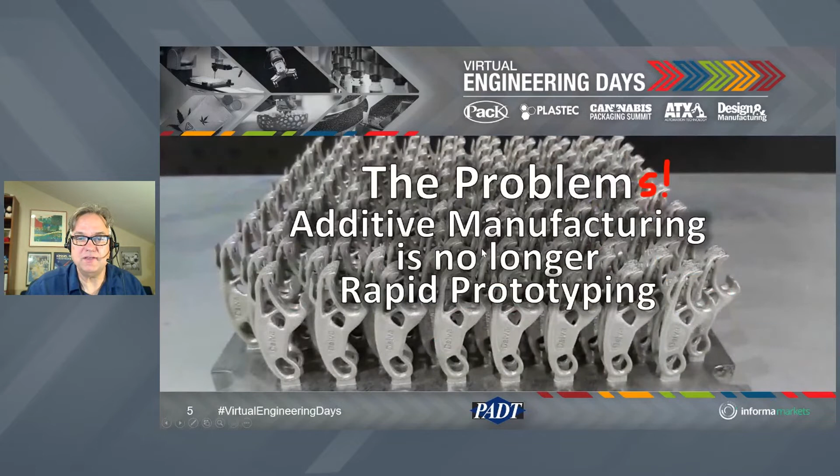So that's a little bit of an introduction about who we are and who I am. So what's the problem? Actually, it's multiple problems. Additive manufacturing is no longer rapid prototyping. We developed this whole world of 3D printing as a service, or internally within a company, really as a way to do prototyping - that's where it was used primarily, maybe a little tooling here and there, but you really weren't making parts that were going out in the world, and you didn't have to worry so much about how the material behaved over the long run. Oftentimes, as a prototype, we were more interested in what it looked like rather than what its mechanical properties were.

In the early days - we've been doing this for 27 years now - every time we handed somebody a new part, they would go, 'Oh, this is cool, how strong is it?' and break it, right? Because we just made it out of a very brittle photopolymer. Well, that's definitely changed. We have a huge selection of materials available now, and a lot of different technologies that we can apply to make our parts. So let's get into a little detail about the problem.

So I'm going to be talking about both metal and plastic here, going back and forth. In metal, we have a real problem with process failure driven by the material properties, mostly the thermal mechanical material properties. We get residual stresses in our build based upon heat differences, and that can cause cracking like you can see in the picture over there. That's one problem we have to be very aware of when we pick our materials.

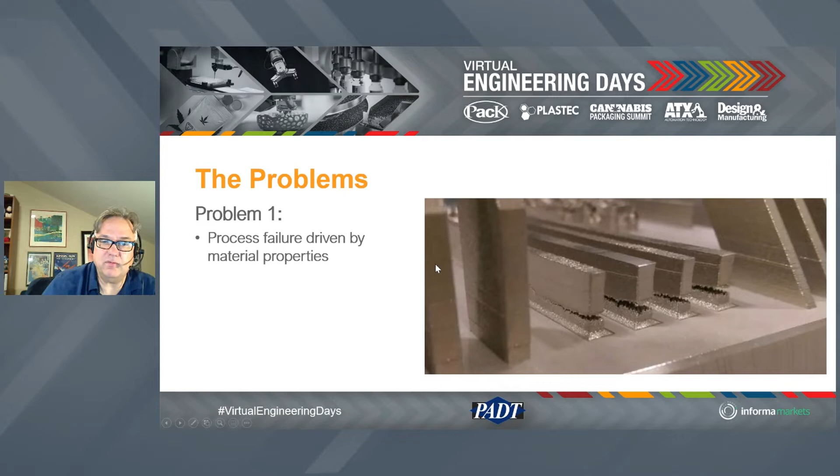The next is, we have these new processes that allow us to make things we haven't been able to make before, and also the end properties. We've got new materials, and still, in many cases, because most additive manufacturing processes are layer driven, we're creating material one layer at a time. We end up with properties that aren't uniform in every direction - they change based upon whether you're in the plane of the build layer or not. We have issues with delamination, and issues with being stiffer in one direction than the other.

Probably the biggest problem is, over time, we've developed this industry knowledge of which materials to use for which things. And that's gone now. Those material assumptions we make when we're doing injection molding or machining or metal forming are no longer valid. We have to take a look at new ways of doing things. So that's part of the problem as well.

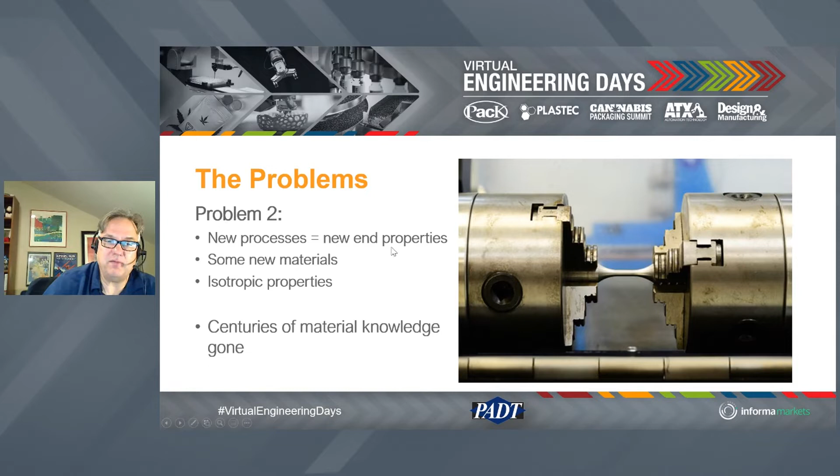That's great if we can pretty much find an analog for a given machine for the material we would use for traditional manufacturing. But the reality is that each machine has a limited number of materials available for it. It's driven by the process. If you're talking about stereolithography, you have to have something that's a photocurable polymer - something that when you hit it with ultraviolet light, turns from a liquid to a solid. If you're doing fused deposition modeling, it needs to be a thermoplastic that you can melt and that will solidify strongly when it cools off. Same thing for some of the new jetting technologies - it has to be a powder, maybe uniform or non-uniform depending on the process, and I've got to find some way to bind it together so I can make my part.

Sintering's the same thing, laser powder bed's the same thing. All of these technologies drive the material options that are available because they have to work with the technology, and that's kind of the factor that makes it difficult.

Another reality is, why are there limited materials? There may be a possibility for more materials, and every once in a while we'll run into a customer who says, hey, it would be great if we had access to this material. And we go to the people that make the material and they say, well, that's great - when you find more than one person that wants it, we'll go ahead and add it. So there has to be a demand as well. It's a bit of a chicken or the egg before they add any material - there has to be a big enough demand.

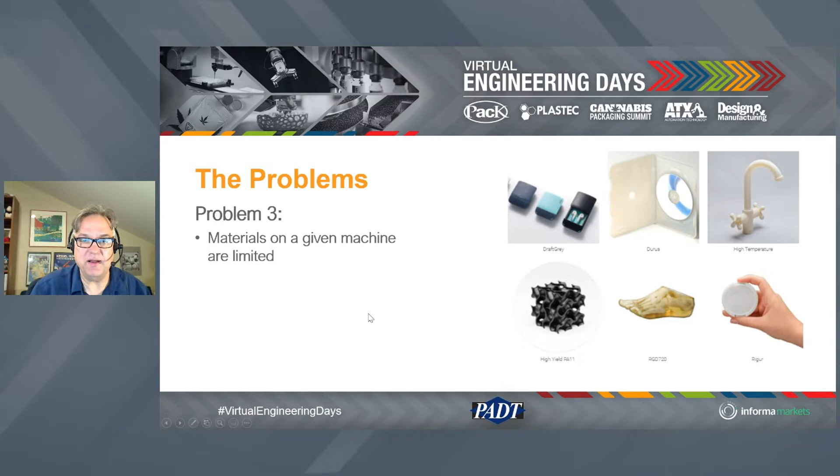Problem number four, which we'll talk about at the end of this presentation, is that we have to track the source, the storage, the process, and the post-processes of the material, because all of those things drive the end properties. When we were making a part as a fit, form, and maybe even function prototype, we didn't really care - we just wanted it to work. Now we have to really worry, because it's going to be out there.

Now, in an airplane - that's one extreme, and I picked that for a reason, because a lot of people are looking at replacing structural parts with 3D printed parts in an aircraft. Now you really have to track. You had to track anyway, but now you really have to know the whole lineage of the part.

But even if you're 3D printing for medical or for a consumer product, say a sporting goods product that's 3D printed, you still need to know, because we don't know how these are going to behave in the long run. We don't know what problems we're going to have. Say we're making bicycles and we're 3D printing parts in the bicycle - we won't know for a couple of years. This is all new. Whether that carbon filled polymer is going to last 30 years, or 20 years, or 10 years, or is it going to crack. And if it does, we need to know what's out there. So we just need to know. That's been a big change.

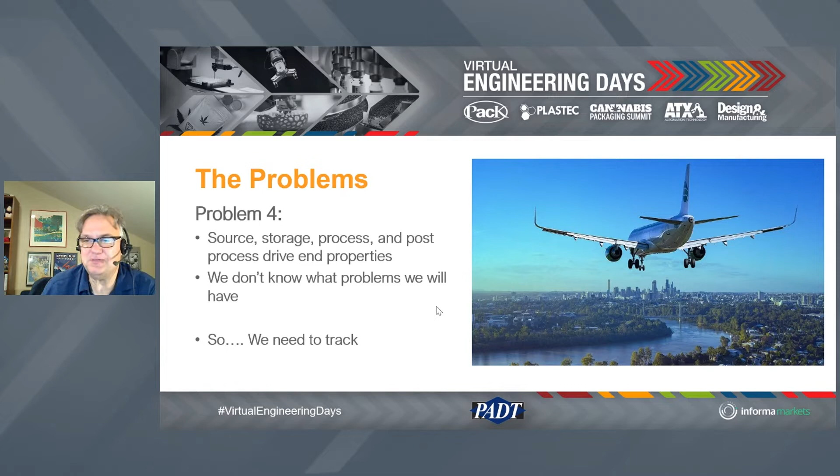And even tooling, it's true. In the past, it was so easy to make a new tool - it would just break and we'd make another one. But now we need to kind of know what's going on.

So what's the solution? What do we recommend to our customers? It's to iterate on the material selection, and then, kind of obvious, track things, and some suggestions will come on how to do that.

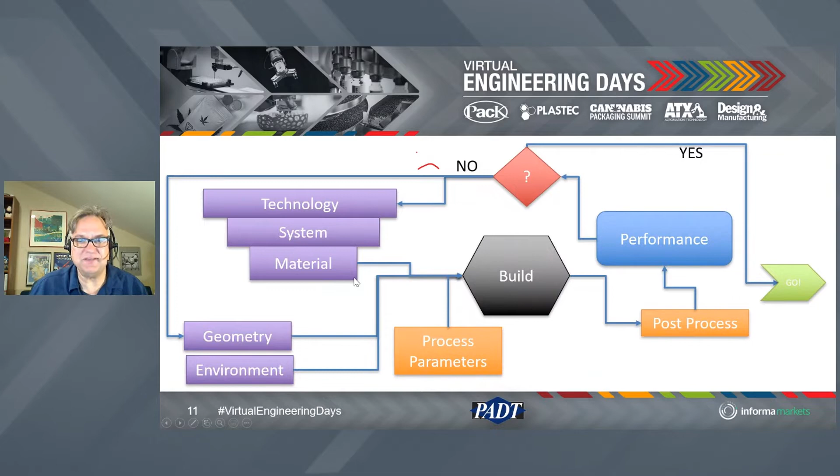So this is kind of my cartoon of what the process is to 3D print a production or maybe even a tooling part. You start over here on the left with your technology. You pick your technology - I'm going to make this on this type of machine. Well, of those machines, I have access to these systems within that family.

Say I'm going to do metal - we have EOS, I've got a particular EOS machine. Well, what materials can I run in that particular machine? So within that selection of materials, I can now make my decision.

I've also got geometry, which drives the final behavior, the environment that it's going to be working in.

As with any manufacturing process, but especially additive, I care about my process parameters. What's my build orientation? What's my layer thickness? What's my beam speed? What's my beam diameter? What's my temperature? What are the things that drive my build? Those also affect final material properties, so that goes in there as well.

I do my build, then I'm going to post process it. Whether it's metal or plastic, I still got to post process it. Say it's stereolithography, I got to put it in a curing oven to get a full cure on it. How much I cure, how long I cure, can actually affect the final material properties.

That gives me my performance, which is what I care about. And now I got to decide, well, after all those decisions and the build is done, does the material performance meet my requirements? If it is, yay, I can go. If not, it's a problem - I got to go back and build it again.

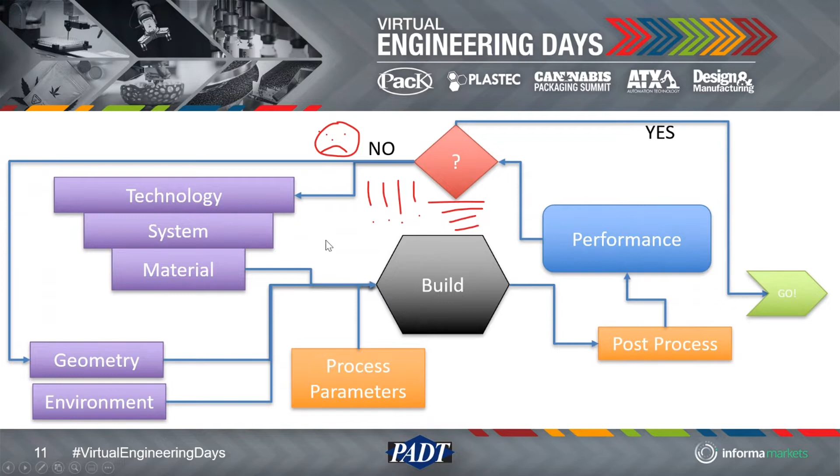This has been kind of the traditional process in choosing materials - we just kind of try it until it works. Which is okay if you have time, or maybe your cost plus, but if you've got a budget and a schedule, it's not such a good solution. So iterating is something you have to do to get acceptable performance. Trial and error, build and bust, and time and money cost money.

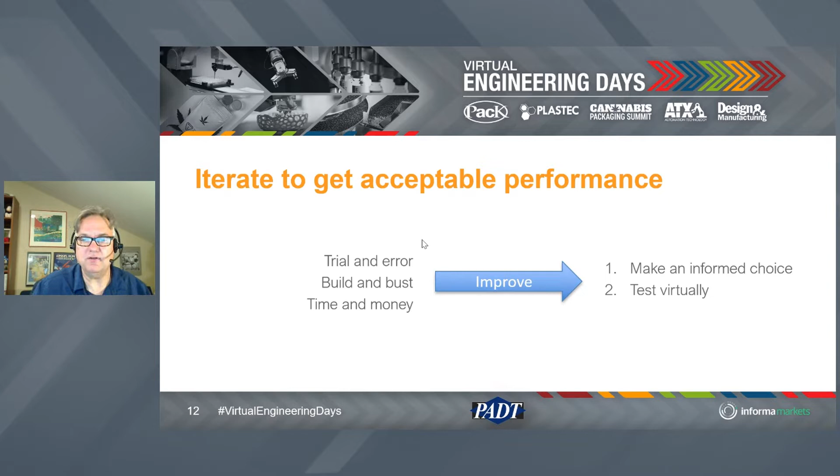So what we want to do is make it as much of an informed choice up front when we pick the materials. We want to be a little bit better instead of just saying, well, that looks okay - we want to pick the right material. And then we want to use virtual testing. I'm going to talk a little bit about both of those.

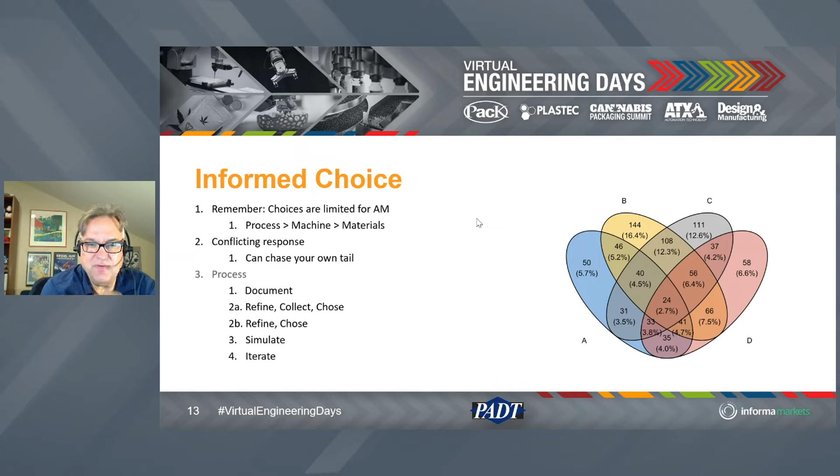So making that informed choice - remember you've got a subset of materials you can use. You pick your process, you pick your machine, and then the materials that are available on that particular machine. And what often happens is within that limited set, you get responses that conflict - you get some of these really kind of crazy Venn diagrams where, well, this one meets my requirements for creep, but it does not meet my temperature requirements. So you can really end up chasing your own tail trying to do that.

So we recommend a process of documenting, refining, collecting, and choosing - or if you've got a tool, refine and choose - and then use simulation and then iterate. So we'll dig a little bit deeper into those steps.

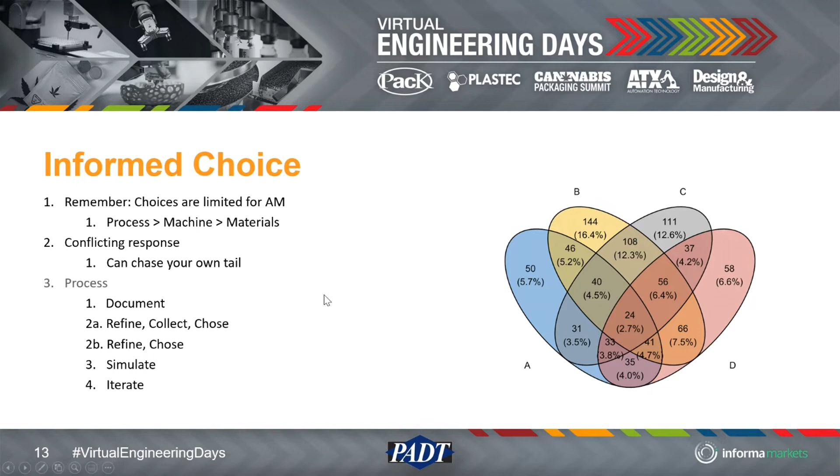So the first step is documenting. This is kind of engineering 101, but sometimes because we're using traditional manufacturing, we don't have to do these things - we've kind of lost our mojo around this sort of thing. So we got to go back to principles and start by capturing the material response requirements - write it down. What's the stiffness, the yield, the hardness, the creep, the fatigue?

And we recommend doing it in a uniform way, so every time you work on a new part, you've kind of got a matrix that you fill out so it's consistent from part to part.

Then you also have to capture the environments. Some examples are ultraviolet radiation - is it going to be in the sun? What's the chemical, what's the moisture? I left out temperature, which is a huge one as well - we sometimes get requirements for parts that need to work in Alaska and Baghdad.

And two extremes in military applications. So knowing those things is really, really important.

What are the other requirements? What are your cost restrictions? What's your lead time, right? You may not be able to get the material you want, or there may be some other things. If you use this material, you've got to do some other things that slow it down.

Geometry is also really important. You've got your initial geometry, right? What the design people came up with. This is the part I want. And you should document what you can change, because you might not be able to get where you want to go with the materials you have available, but if you change the design slightly, then you can get there.

If you're really being sophisticated, you can assign weighted importance to certain things, right? So what is the most important thing? Is it fatigue life? Is it hardness? Is it how well it resists certain environments?

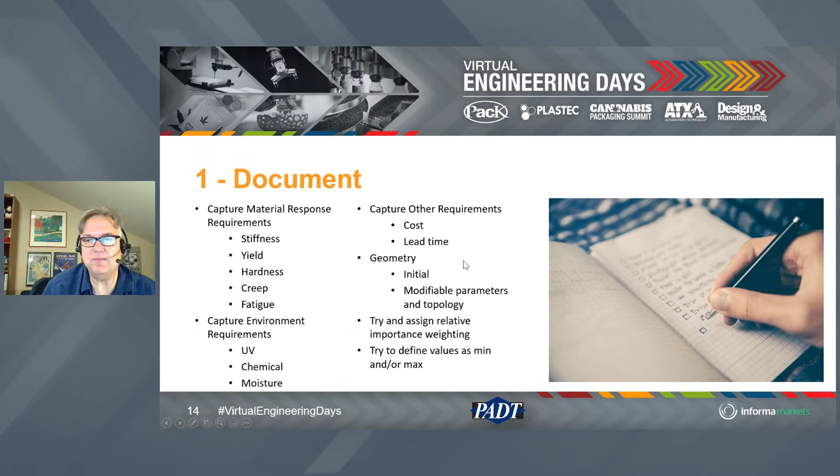Also try to define the values as mins and maxes, not just 'here's the yield I need.' Give it a range, right? So that gives you more flexibility to find a material that hits the sweet spot. Keeping this, documenting this and writing it down in a consistent way is very important.

Let's assume you don't have a tool, which I'm going to talk about next, to help you make that decision. So you're going to manually pick your materials, which is fine. If you don't do it very often, it's fine. So what you're basically going to do is refine the process, the system and materials, collect all the available materials you have. Go to the vendor site, find the materials they have, get the material properties.

One thing I often see is they'll use, say, the material sheet as shown in this picture, but every vendor is a little bit different. And sometimes even within a vendor, the material properties are shown in a different way, right? So what I recommend you do is make your own little spreadsheet or document that has material properties in a consistent way.

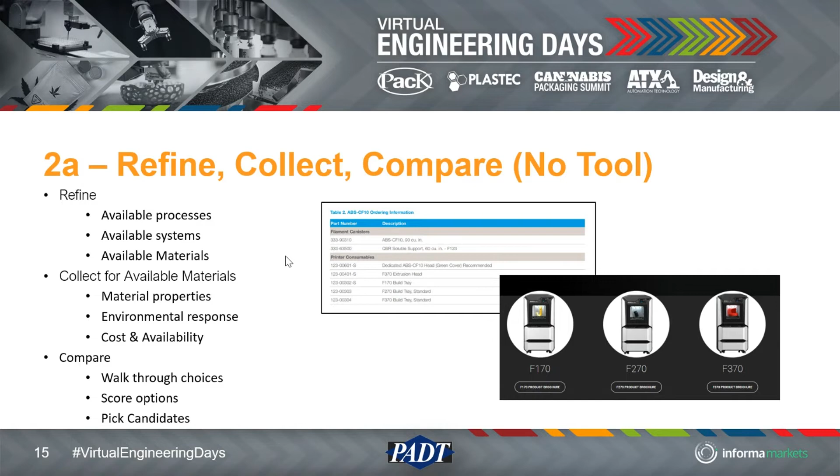Also for that material, document what's the response to environment, how susceptible is it to temperature, what's its temperature range, what's its creep response, these sort of things, as well as kind of a ballpark look at cost and availability, right? Well, cost doesn't have to be ballpark. You can figure out what the cost is per pound, right?

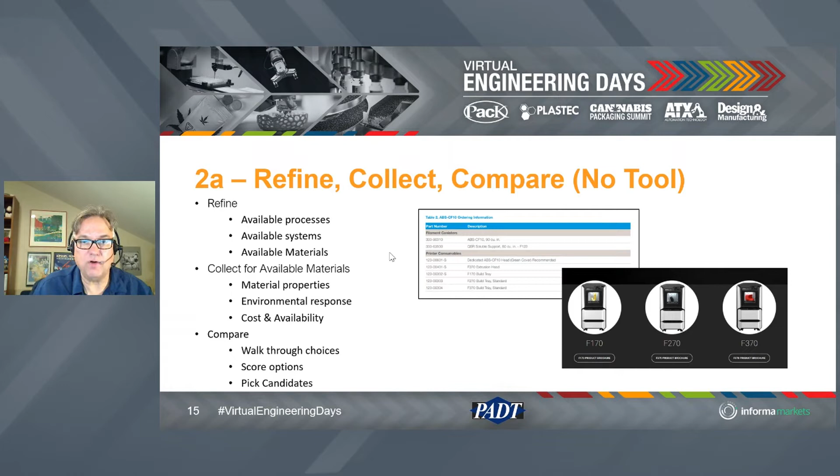So do all that, and then basically you've got to sit down, close your door, put on your headphones, and walk through the choices. You can use your own methodology of scoring it. I've seen some very sophisticated spreadsheets, or you can just kind of pick one and see if it fits. If it doesn't, move on to the next one and see if it fits. Kind of pick the ones that work for you and give those a try. So start with the one that looks the best.

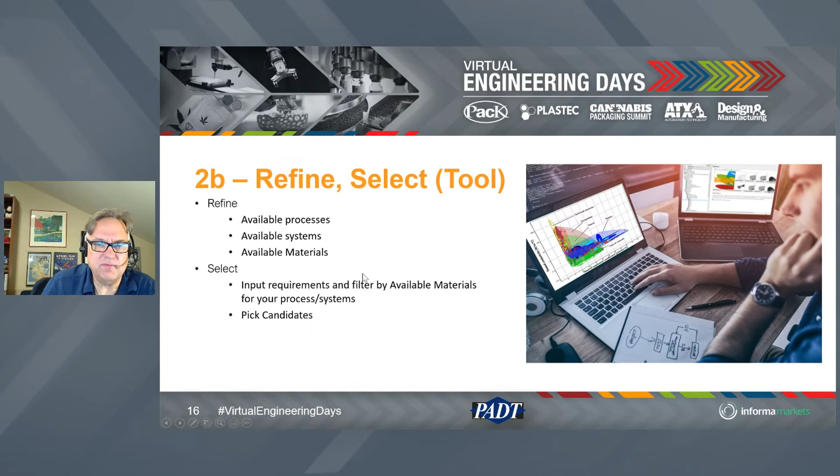Now, if you have invested in a tool or have access to tools, you do the same thing, right? You find the process, you find the system and the materials available, and then you put them into your tool, and you put all these requirements into fields, and it will do these diagrams or more sophisticated ones. I'll talk about the one that we use, Granta, but you can make your own as well, whether it fits into those areas. There are other options out there, but the idea is to create a matrix of what works and let the tool do that work for you, or at least list the options.

So the two most common ones out there are the material searching tool on Senvol, right? And I've got the links at the end for that. It basically allows you to fill out a form: these are my ranges, this is what I care about. And it'll tell you what materials are a good choice, right? It's not going to tell you what's the best, but it can tell you what's a good choice.

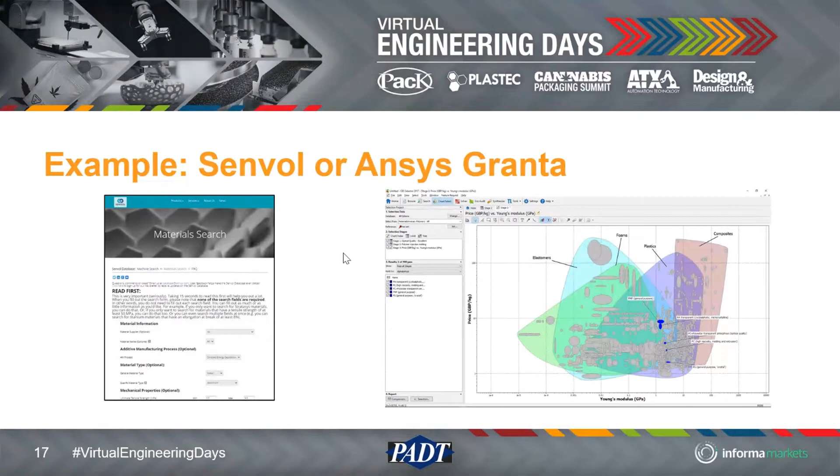We use ANSYS Granta, and full disclosure, we also sell it, but we do like it a lot for ourselves, and we use it not just for 3D printing. We use it for a lot of different things, but it's great for 3D printing because it's often a tough choice due to the limited number of materials we have available. You put in all these requirements, and you create these graphs where you can really find what's the right family, and then what is the right material for what you need. Granta does have the materials that are available in the Senvol database, so that's kind of a nice option for you.

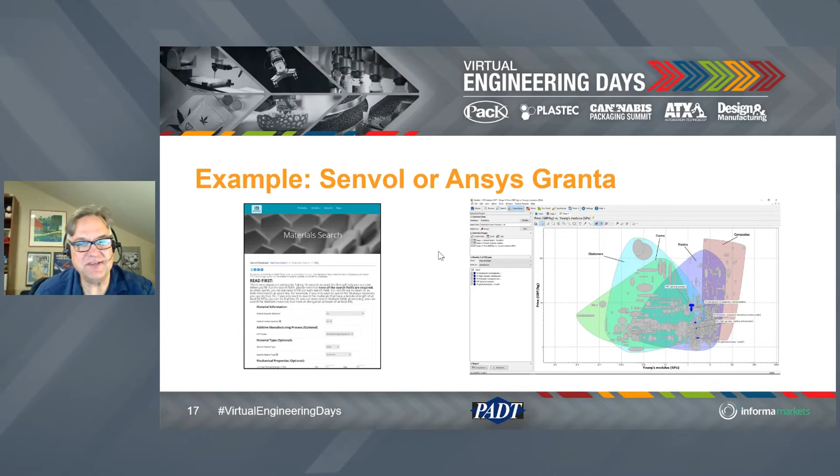I keep calling it Serval, which is a cat. Senvol. Sorry about that.

As I mentioned when I talked about our company, our background is really combining simulation, 3D printing, and advanced design. So needless to say, when we're trying to do advanced design with 3D printing, we're going to put simulation into that loop. And I think it's a missed step. A lot of people maybe don't use simulation heavily in their industry or their product line, so they're not used to putting it into the loop.

But oh my gosh, this can save you so much time in finding the right material. So what we like to do is basically try each material in simulation, and then we've gone through those previous steps, 2A or 2B. We've got our list of materials. Instead of building and testing, we're going to go ahead and just run it through simulation.

And we can do things like creep, we can do things like fatigue, we can do vibration, we can do all the different things that you need to do in a very inexpensive and quick way, and do a go no-go on the materials from a virtual testing environment.

The other thing that we can do is say, okay, well, I'm going to use this material, but it's additive manufacturing. The material properties are kind of a range. They're not a specific number, especially when you get into the directional dependency of some properties. So what we should probably do is explore the sensitivity as well.

So yeah, my Young's modulus varies quite a bit based upon my orientation in the machine. So how sensitive is my part to that? Let me run it with a couple different orientations where Young's modulus is different in the different planes. And then I can see, well, is it a big deal or is it not a big deal?

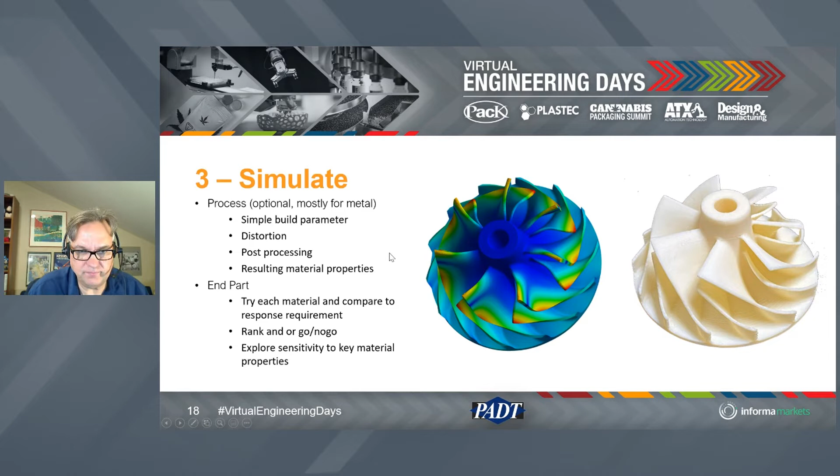And then last but not least is to kind of iterate. Keep trying it over and over again if you have to, if you can't get where you want to go. And part of that is changing the geometry. Now, I'm showing kind of an extreme example here that we did for a customer of topological optimization, where we not only got it to work with the material that was available.

Let me back up a little bit on this, because it's kind of a different approach. Instead of saying, here's the geometry I want, which material is going to work, we said, this is the material I have to use. Here's my loads. Here's how it's attached. Now change the geometry in order to give me a shape that meets my performance requirements with the material that I have to use.

So if I can't change the material, I can change the geometry or some combination of those. And sometimes some small changes, just like, maybe your material just isn't getting the fatigue life you want. Change some fillets, change some holes, maybe change the load path a little bit, stiffen something up a little bit, and you can get where you need to go with the material limitations that you have with what's available in the machine you have.

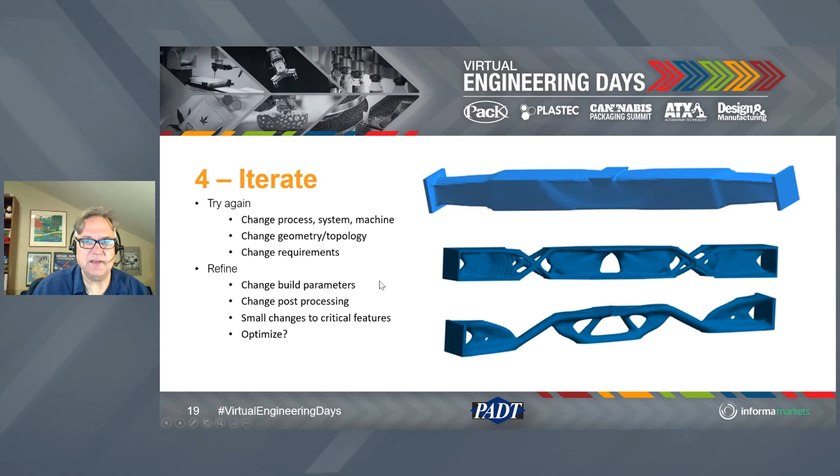So I highly recommend thinking about it that way. If you have to fix the material, change something else in the design, maybe the geometry, maybe the loads. So that's kind of an overview of how we recommend, when you're having a tough time, you go through and pick your materials.

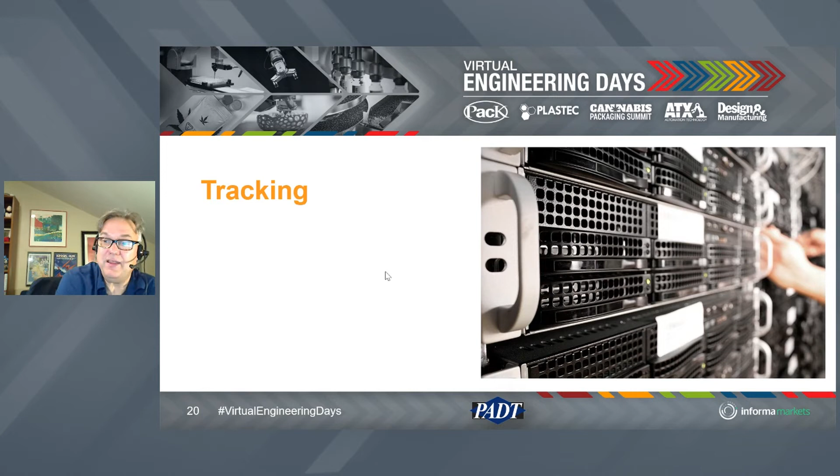So let's say you found the right material that works for you, you've used simulation to verify it. It meets your cost goals. It's available. It runs well on your machine. You figured out your post-processing steps. So you're good to go.

Now, how are you going to track it? So if you're in medical aerospace, you're running under some sort of ISO requirement. You've probably already kind of figured this out. This is old hat. You've got a set process for traditional manufacturing. Just adapt it to your additive manufacturing process.

And really the key there is to make sure your quality people understand all the steps involved. So, this is basic again. You capture where the material is coming from. You document the process the material sees when it goes from raw material to end part. You mark your parts in a way that you can trace it back to the material, whether that's lot or individual serial numbers.

And then you use some sort of documentation, whether it's a database or paper, to tie all this information together. So for a given part, you know where the material came from and what happened to it through its lifetime. You may even want to tie in life cycle management, looking at distribution and support.

So if you've got an ERP and lifecycle tracking tool, this is all done - you just need to figure out how to get your additive manufacturing process in there. You map out your process, sit down with your quality people, and get it in there. If you don't have a tool already - let's say you're not traditionally one of these industries that has to worry about this, you basically just buy bulk plastic and injection mold - you've got two options: you can get a tool and a process, or you can do manual tracking.

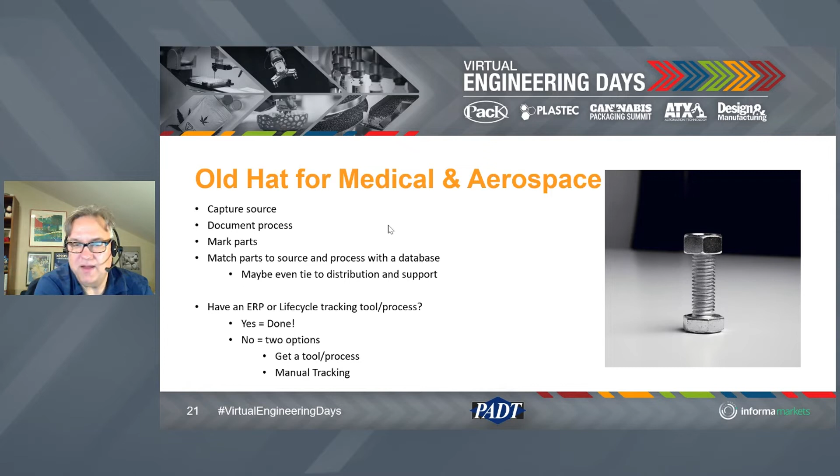If you get a tool, the tool is going to drive what's going to happen, so I'm not going to really talk about that. But if you don't need to do this a lot, manual tracking is a way to go. I think nowadays we want to make everything electrical and electronic and digital, but if you're not doing a lot of stuff, a paper router may be the answer.

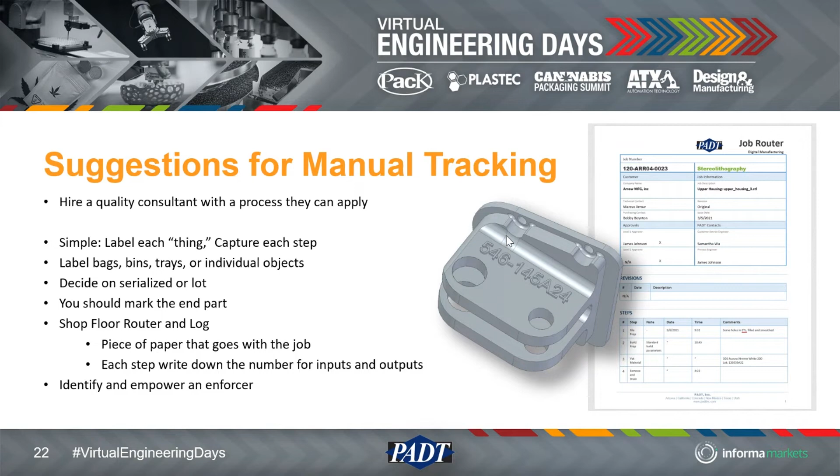What I've seen work the best is you find a quality consultant out there that's already got a shrink wrap process they've used at other companies, and they just tweak it for your situation. If that isn't a good idea, what we recommend is a basic approach.

First thing you need to do is make sure everything's labeled - it's either in a bag or a bin or a tray, or the part itself. I give an example here of a part I'm working on where we just put the serial number into the part. We've got a little script in our CAD package that can change that number very easily. You also want to know your process and capture each step.

Decide if you're going to serialize or do it by lot. Lot's fine - you don't have to make everything individual, but if you want to, you can serialize as well. Make sure the end part is somehow identified as lot or serial number.

If however you track parts through your additive manufacturing process, you want to go ahead and log the material information - that's kind of the key, really. What's unique about this is you're hopefully already have a process logging system in place. I made this part for this customer or for an internal customer, and here's what I did.

What we're doing is adding not just the material, the raw material that went into it, but the things we did to the material along the way - what kind of pre and post processing we did.

The number one thing we found, and this is true whether it's additive or not, is any kind of tracking system like this, you've got to have an enforcer. Because you put it out there and it looks great, but when schedules get tough and machines are acting up, you need an enforcer - somebody with a big stick, virtual stick, that can make sure you're still following this process two years from now.

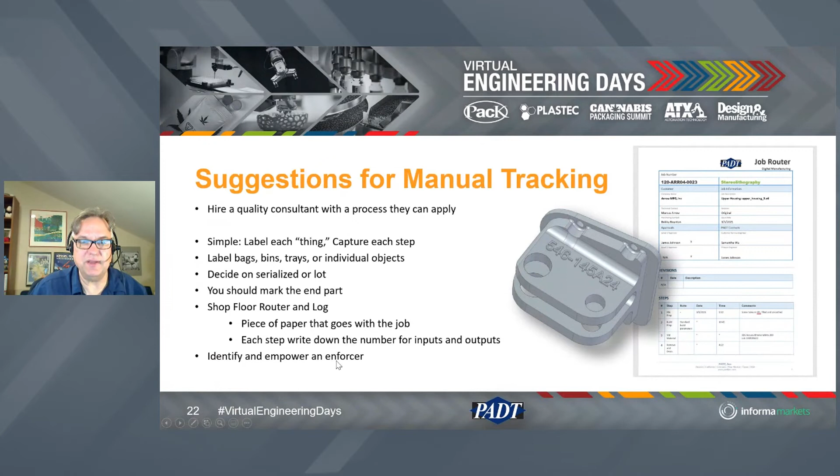Because what tends to happen is there's not a problem, the process drifts. We were in a hurry, so we skipped that. Nobody ever looked at it, and then you get a failure in the field, and you're like, okay, what material did we use? What else is out there that used that batch of material? And you don't have that information. So key to it is having somebody responsible for making sure people are doing this properly.

So that's kind of our suggestions on how to solve the problem - how to pick the right material, and then how to keep track of it. Again, some basic stuff, but you've got to sit down and think about it and map it out and make sure it's done. So let's talk about the future - let's talk about what's next.

So, I love buzzwords - that's sarcasm if you can't tell. But a big one right now is Industry 4.0 or Manufacturing 4.0. So what is it? Well, it's really putting sensors in your manufacturing systems and then connecting them so they can talk to each other and you can collect data as you go. So it's more automation, more robotics, more steps being done by machine rather than people, and digitally controlling, monitoring and tracking that process.

So AM systems are smart and integrated.

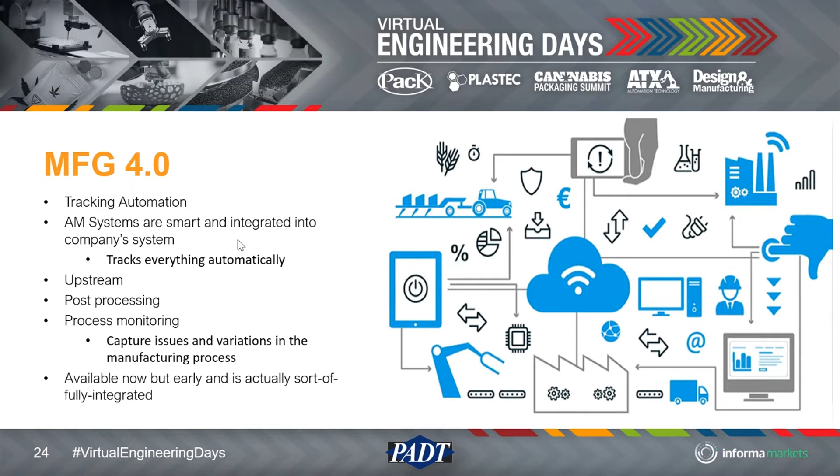They're smart already, right? They're computer driven systems. They're not necessarily integrated at this point into customer systems. There's some really good software out there that allows you to do that. Some of our larger aerospace customers have been pretty successful in creating a network of their whole process, having all the data in one central location.

And the key was that it does everything automatically, right? You just run your jobs and it keeps track of stuff as it moves through the system. It's very important that the upstream be captured as well as the post processing and process monitoring while you're building. One of the big benefits of this from a material standpoint is there may be some unexpected behavior during the build, let's call it that.

If you can capture that, and then down the road you're seeing some problems in your parts, it's like, oh, these guys aren't having the fatigue life we want. Well, it turns out there's voids. Say it's metal, right? And voids can happen because of the path you choose, the layer thicknesses, and a bunch of other parameters in a metal build with a laser. So capturing that in an automated system like this, when the problem comes up, you can go look it up and see, well, look at this.

The laser power was varying by 10% in these builds, and all those builds are showing failures. Let me find other builds that haven't been out in the field as long, right? So these are the kind of benefits of it.

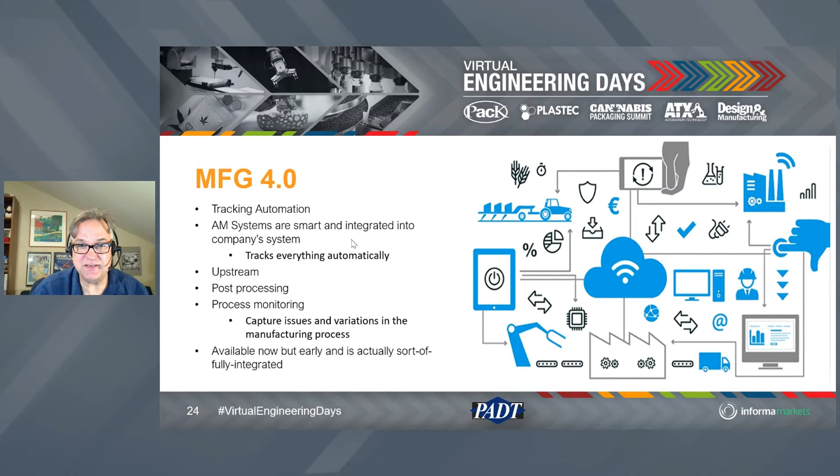So all of when I take a vat or a drum of powder, right, I'm going to scan it and put it in the system, and it's going to know that that goes into this machine. So that's all taken care of for you.

So the next one is we'll actually prove this out. A lot of what we have to do now from material selection and tracking is because we don't really know what's going to happen, because it's new, right? So it'll become low risk over time, and we won't have to track to the level that we track now. We may have to only capture anomalies and not have to worry about tracking everything.

And the key to getting there is tracking well now, right? So if we have the data and we're seeing good behavior out there in the real world, we can say, okay, well, we've proven this process out, we've proven this methodology out, this inspection, whatever it is, this material source and inspection. Now we can go ahead and just assume it's going to work as long as we follow that procedure. We don't have to track it.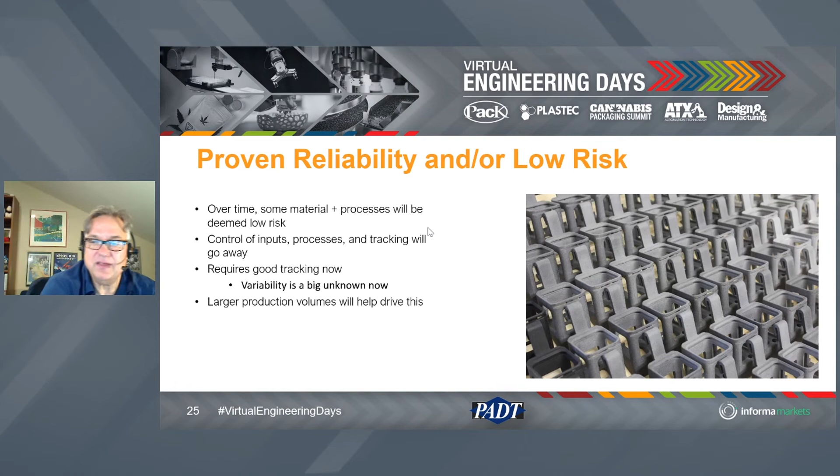And of course, when we get to larger production volumes, which we're starting to see, that's going to make this happen, right? So there'll be a lot of things out there, and we'll know. And we're already starting to see it in some areas.

Of course, the other thing that's going to happen in the future is we're going to get more machines, different kinds of machines, totally new methods to create parts, right? Maybe they'll be less layer oriented. Maybe there'll be more uniform material properties. And all of the vendors that have existing systems are refining those. I mean, every new machine that comes out, it's a new capability, a new refinement, more accurate, whatever it is.

The other thing that there's a lot of work in is post processing, and this affects material behavior, right? So we're learning, especially on the metal side, how to post-process these parts so we can get better material properties when they come out of the machine. We're also learning on the plastic side, right? Support removal—what's the best way to do that in a way that keeps the material properties going, or doesn't break the part? What's the best way to maybe seal a part, right?

So maybe part of the post-processing on a layered process that isn't 100% waterproof is to do some sort of a surface treatment that seals the part. Well, these are all things that people are working on. Another area to be aware of is some of these new technologies—let's be frank, they make these ugly gray parts, right?

That's the material they're using. But what if you want green or blue or red? Well, there's new processes that allow you to dye that. So one input could be in your material selection, this is the color I want. Now it's not part of material selection, it's part of post-processing. How am I going to dye that material, and what does that dye do to the process? So look for that sort of thing coming out, painting, coating, those sort of things.

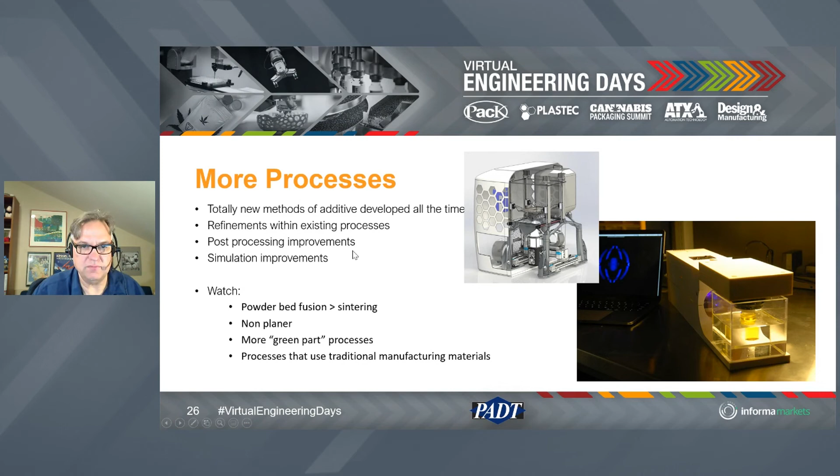We personally do nylon filled with carbon, and ABS filled with carbon. We've seen some other fillers as well that we've played with. There are a lot of options out there, and it can really get you closer to the material properties you want using additive manufacturing. As we get wider adoption, the cost is going to come down and we'll get greater variety as well.

There's also going to be new processes that open up new materials. I need to follow up on this, but a couple years ago I talked to a gentleman working, I think at 3M, on a Teflon based, PTFE based process. Wouldn't it be great to 3D print Teflon parts? Well, they've got a machine that does it. I don't know that it's commercially available, I think they do it as a service, the last time I talked to them. But these things are becoming available, and there will be other people, maybe on the material side, maybe on the machine side, coming up with new materials that give us greater flexibility as time goes by.

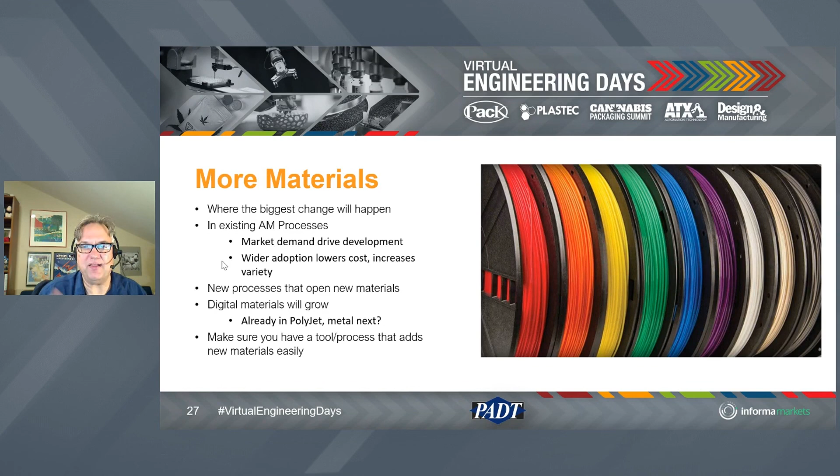When you're picking your additive manufacturing technologies, it's probably better to invest in machines that allow you to add new materials. You might want to save money and think, this machine only runs ABS and that's all I need. But guess what? You probably need other materials as time goes by. So think about that long-term flexibility when you pick your machines, so you can run different materials.

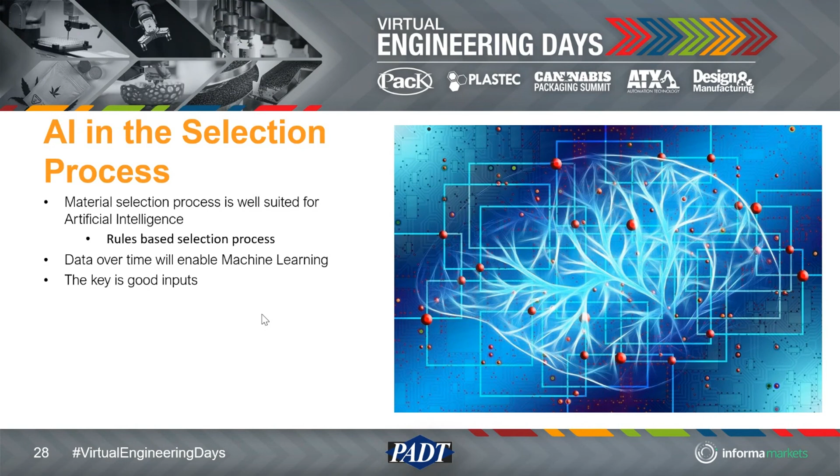Look for that to come out with the tools we already have. I expect that to be added to make them smarter. And over time, we should be able to do machine learning. As we get more data out there in the field of parts being made, we should be able to look at how it behaves and make better decisions using machine learning algorithms. The key to all of this is good inputs—that doesn't change. Hopefully we'll see this come on the market very soon. There may even be some people out there offering this up right now that I'm not aware of.

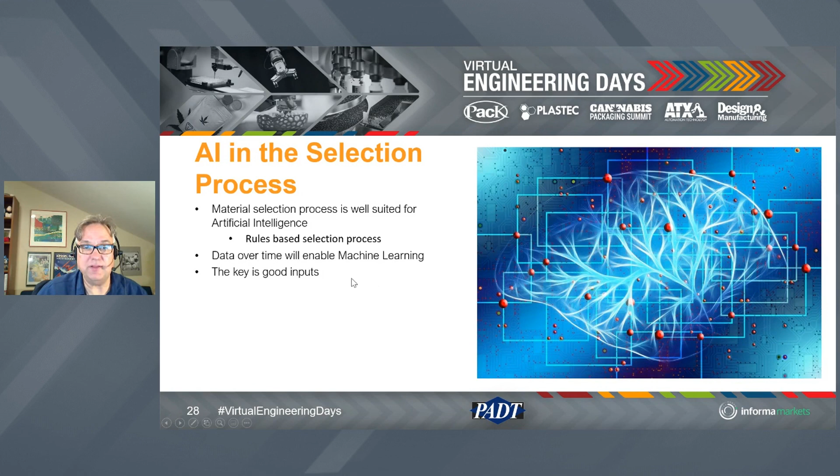So that's what I have to talk about regarding the future.

Resource wise, here's some information about PADT. Please check out our blog. We also have a site for the community called 3dprintingglossary.com, which we highly recommend if you want actual definitions of different things in the world of additive manufacturing. All of the additive manufacturing vendors have good sites, especially the industrial ones. We use Stratasys and EOS, so I recommend checking out their material information. 3D Systems also has good information—we run their machines at PADT too, so we use their material finder as well. Anybody with an industrial system is going to have a materials resource.

Also, what's on their website is kind of what marketing lets them put out. If you're really struggling with materials, reach out to the company and get in touch with their technical experts on material selection. Not only can they help answer your questions, but often they have materials that aren't commercially available yet, offered under a beta program, or recommendations you're not aware of—maybe post-processing or other things to get the properties you want. So if you're struggling with materials, go to whoever you bought your machine from. If it's PADT, give us a call—we'll connect you with the experts on materials.

Also check out the ANSYS products materials page on the Granta product—highly recommend it if you're dealing with a lot of materials, it's a great tool. The Senvol database is available on the web as well, fantastic. NIST has a fairly robust, though maybe not as complete, set of material properties for additive manufacturing. And UL is getting into this area too—they've got a thing called IDES, a product browser that lets you pick materials for additive manufacturing.